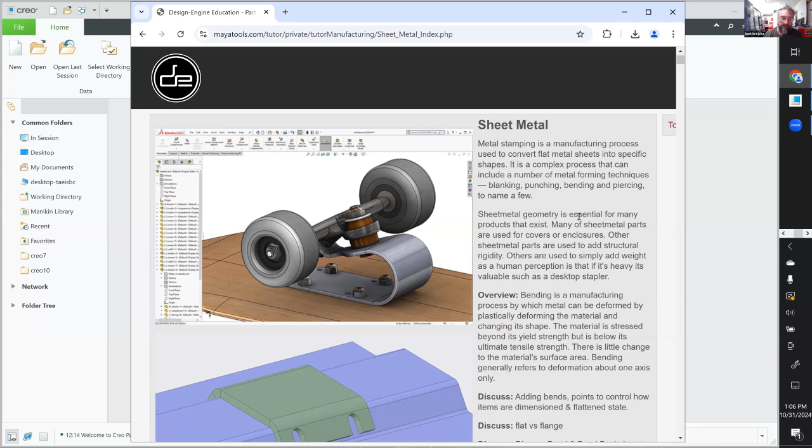You crash a motocross bike or sport bike, and the titanium exhaust bends, and you've got to fabricate a new mount because you don't bend titanium back - it'll tear. So you have to create a new sheet metal bracket right there at the track - vice, crescent wrench - which is funny because we don't take into account any stretch or K-factor that occurs.

So I thought I'd do a quick introduction of the class, and then you guys speak up and tell me what you want to see, and we'll wing it. I did a 4-day sheet metal class for a military group recently - most everybody had some experience in sheet metal, but in 4 days we pushed some really exciting examples using top-down design. I'm going to scroll to the bottom of this class and point to that.

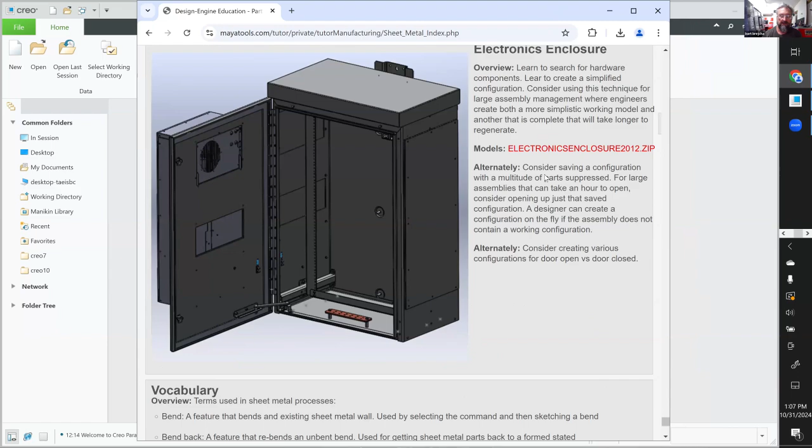I just recently did 4 weeks of training at Newell Rubbermaid, and this happened to be sitting on the desk - it's a sheet metal part that's bent. Built that all with top-down design, fetch a surface out of it, and then how do you put the holes in? You put the holes in flat, or maybe it comes as a perforated sheet and it's bent up in that way. But in Creo, you've got the bent-up shape - what do you do to build all that?

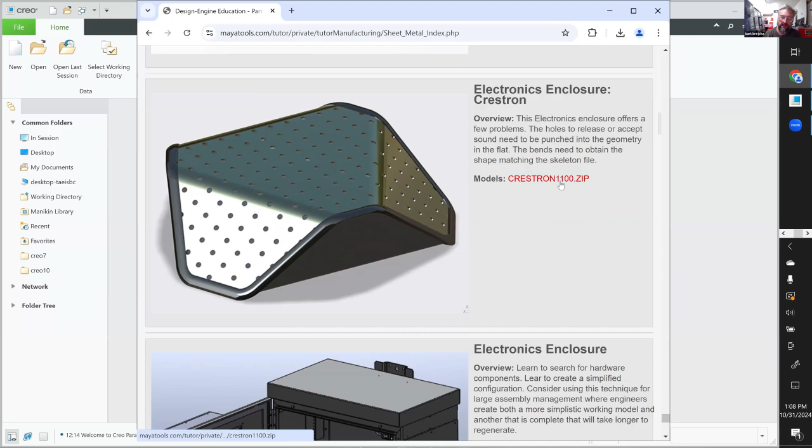So I just put that at the end recently, and in Creo - in Design Engine speak, anything with 1100 on it means it's done in Creo 11. Okay, so I'm going to scroll all the way back up to the top.

And this example has some skate trucks that aren't made with sheet metal. Your challenge is to use the same points that we created the trucks with - top-down design oriented geometry - and then put this spring part in, same points but a spring. Interesting project - this one is an IGES file, something you download from McMaster-Carr where you can buy quantities of.

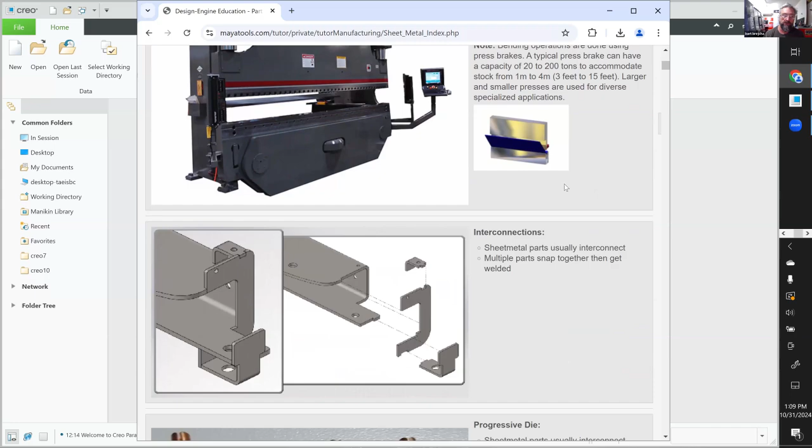How do I make a bracket looking at a step file? Of course, we're going to figure all that stuff out. But the classes have a wide variety of examples, and as you can imagine, exciting - Design Engine classes, you don't fall asleep in.

So with that kind of quick introduction said, I thought we'd start out kind of simple and build something like this. The examples can range, so I'll just let you guys start throwing stuff out there.

Here's a latch for your door in an F-150. What points are significant and how do we organize this? This is a sandcast or die-cast steel part, right?

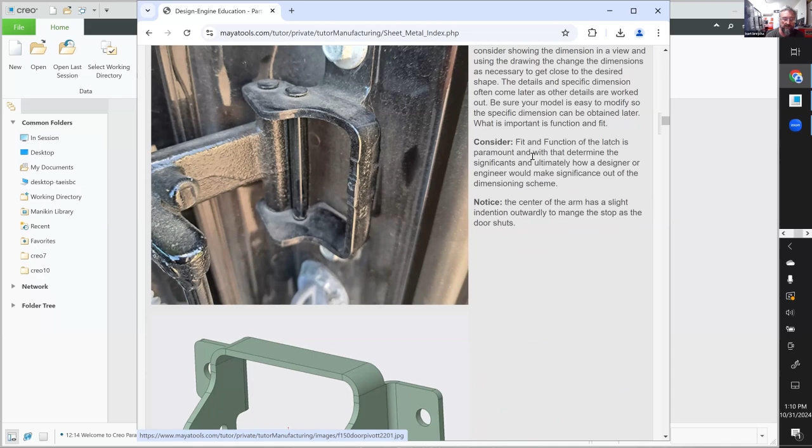What's significant about this bracket is this distance, because that part probably already exists. So we're trying to nail all those geometries. Here's the part that you can buy. Maybe you got a step file and you've got to make a bracket mount to it. There, that's the example, right?

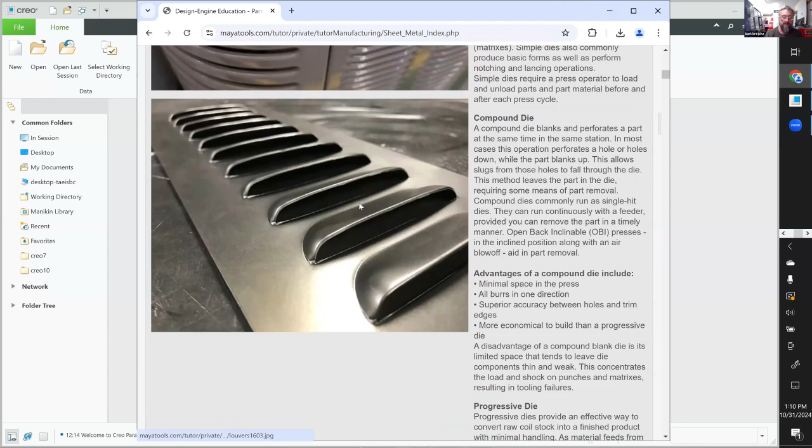So if nobody's going to throw out some thoughts, I'm just going to quickly build this shape here and think about how, we'll start out kind of simple. What do I do to build that?

Design engine's very geared at it's not how fast you model something, but how fast you change it 20 times that makes you kind of an expert. We can model it quickly, but if you can't change it, you're not the expert, right? So I like to say an expert would never tell somebody that they're an expert. They would wait for somebody to tell them that they're experts, right?

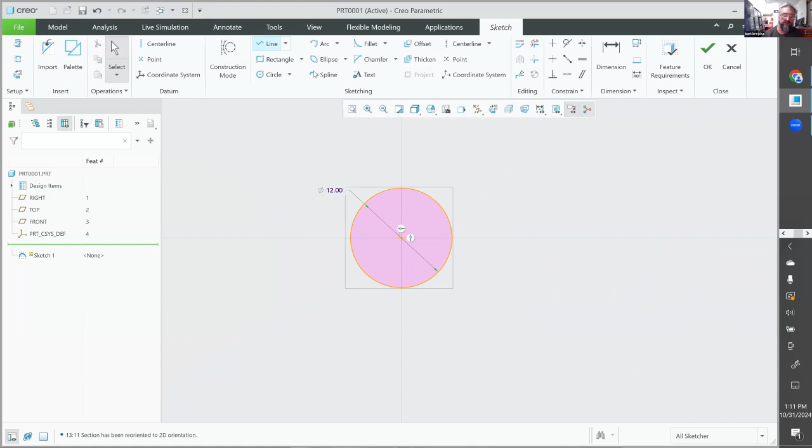So whatever the diameter is of this thing, is anybody in Creo 11 yet? Nope. Design engine, we just use whatever software the customer tells us to, so it's not a big deal.

Somebody's going to say something. I interrupted. Hey Bart. Yeah. I had a quick question kind of related to what you're discussing. Do you have any recommendations for how do you start just making a sheet metal part?

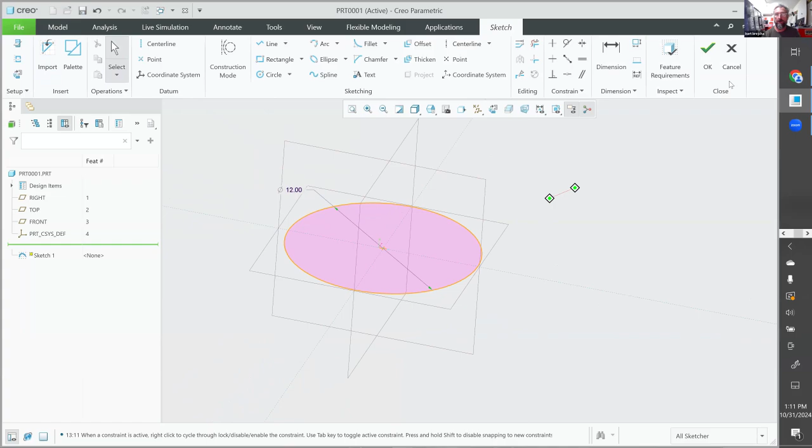Do you just want to put your pen to the pad, or do you want to think about it ahead of time? That's what I did. I started going to the pad and sketching stuff in Creo. So if you're working for the military, I don't mean to be insulting, but the military documents are all built in the 1990s, back when people were doing bad practice and stuff, right? So I just went and started into Creo.

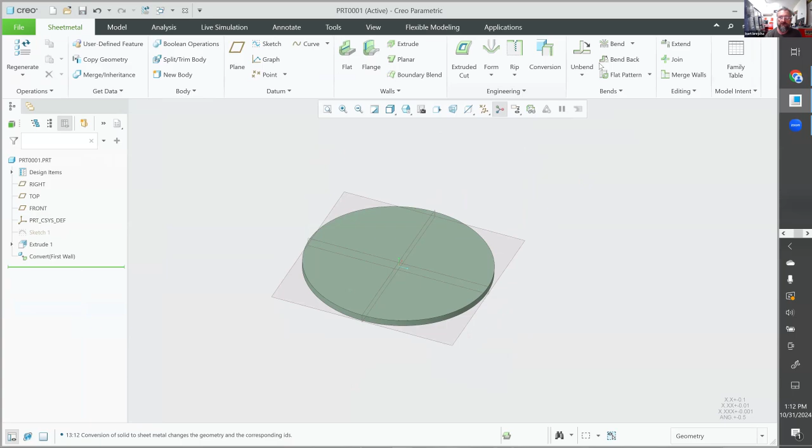But if I wanted to, I could extrude this part and convert it to sheet metal. So if you're a contract agency working in military, this is not how they want you to build it, right? So I can come over here and literally convert this thing to sheet metal. I tend to err on clicking on the side that the sketch is sketched upon, right? And now I can build a bend across here to try to bend the thing down, right?

So let's do that. I'm just going to get my head wrapped around the shape. It's a circle, it kind of comes to a point. I'll redefine that sketch to organize that shape.

So me and design engine itself, we're kind of new school. I don't know about you guys, but I'm kind of a rule breaker, not a rule maker. So I don't, best practice is kind of a rule, I suppose.

Hey, did you know this? I don't need a center line to force symmetry anymore. Did anybody tell me when that was new? I think that was new in Creo 7 or 6. All right, so...

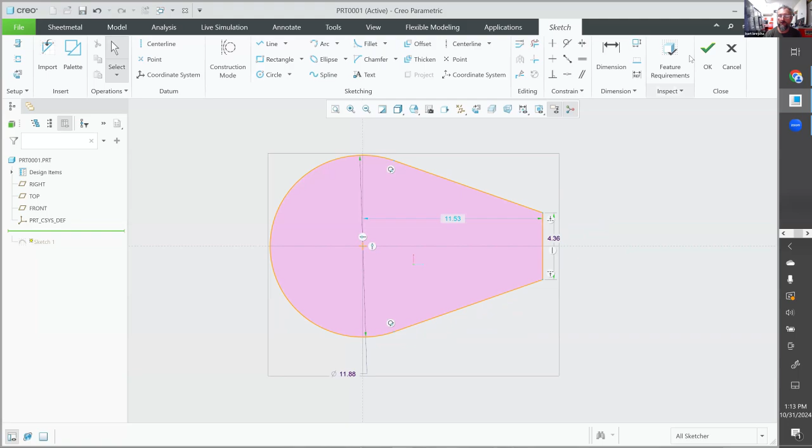Whatever I modify this to, or you could drag it with your mouse, right? That's pretty cool. All right, so that looks like the flattened state. I keep losing where my picture is. Yeah, all right, now I got to create the cut on the inside.

Well, people that count features would update this and make it more complicated. I'm not a counter, so I don't think it really matters. I'm just going to encourage the team to use all the cool new tools in Creo.

You see how I'm highlighting the datum plane? Don't ignore this pop-up window. I've been trying to encourage PTC to let me customize, right?

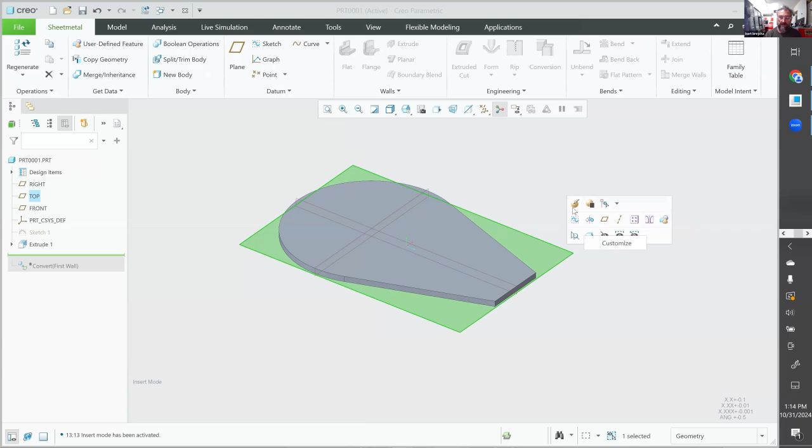You can right-click and hold down and customize this, but I want it to be like a marker menu and alias. I haven't actually shown how that works to PTC, but I think that would be the next step, in terms of having—AI is the next step. But I want to customize this geometry here, so I'm just going to quickly build.

See, I'm fetching the horizontal and the vertical, so I'm taking advantage of all the middle click, left click, delete, all the assumptions that I can leverage. I shouldn't mention SolidWorks, but SolidWorks doesn't have all that stuff. They started to go down that road, they just didn't finish it. Now I can use my coincident constraint to align this end to that end, right? So we'll just left click on that and turn it to a diameter.

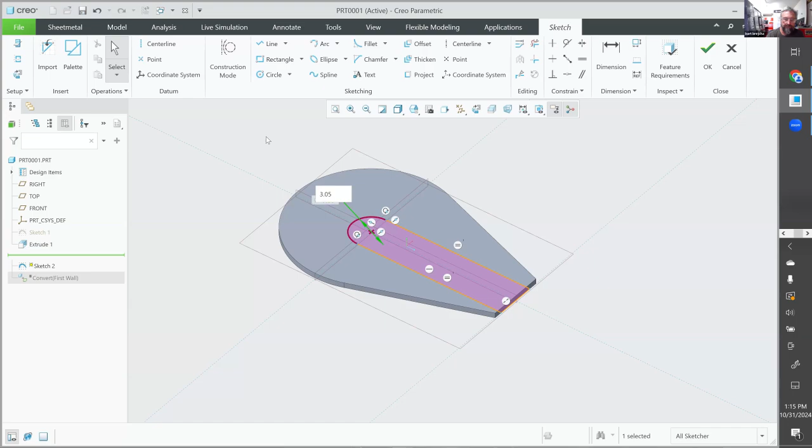And forgive me, I'm not thinking about the size, whatever. So a lot of folks, I'll tell you, if you give me people that have 20 to 30,000 hours on Creo, with Creo update training, I can get them 30% faster.

Most people don't know you can right click on these dots. That was new in Wildfire 5. Nobody's doing it, so my goal is to be new school. Also, most MEs don't know you can drag stuff around in Creo, and if they did, they would lock the dimensions in sketcher mode so you can't do it.

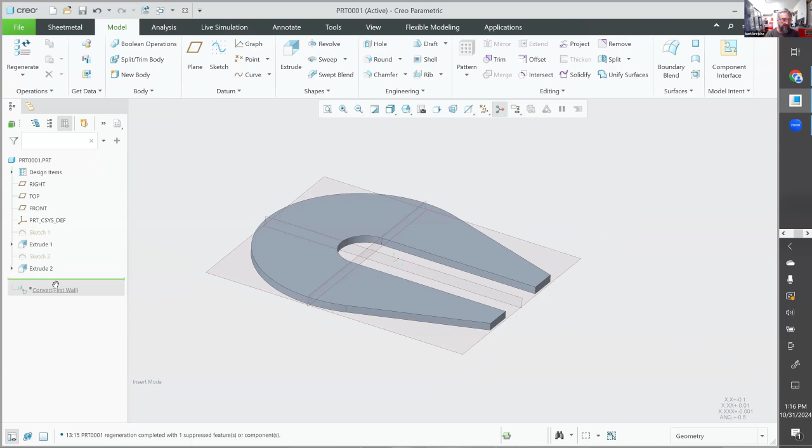All right, so there's my basic shape. Now this was my feature to convert to sheet metal. The question was, do I go file new and start with a sheet metal part? If you work for the US military, there's a 70-page document that says you have to start with a sheet metal part - you can't start with a solid part and convert it to sheet metal. No big deal, so now I'm in sheet metal.

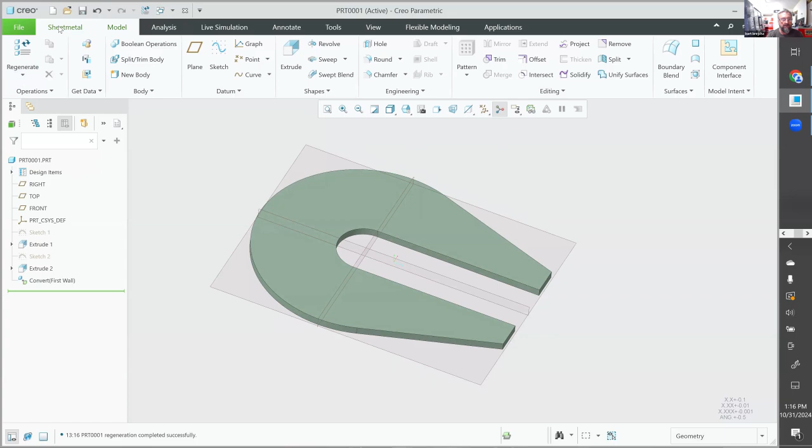I'm in the tab for sheet metal, and I'm just going to reach for the bend utility. I click on the part. Now, I don't know what year this was new, but PTC wanted to be able to show off the utility, I suppose. This is a what-you-see-is-what-you-get dragger utility. I personally don't use it - it's cute and everything, great for sales.

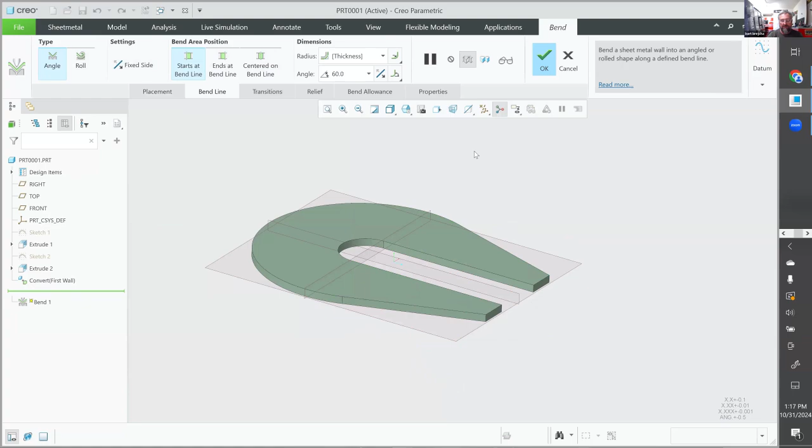And you can drag all this stuff. I just want it to be straight across. So what we've done for 30 years in this utility - I think I started playing with sheet metal in 1992 - is you take the bend line back to the sketch. See, I lost that whole thing I just did, so it's not even helpful. It's just creating something that's absolutely straight across. Look, I got the automatic vertical.

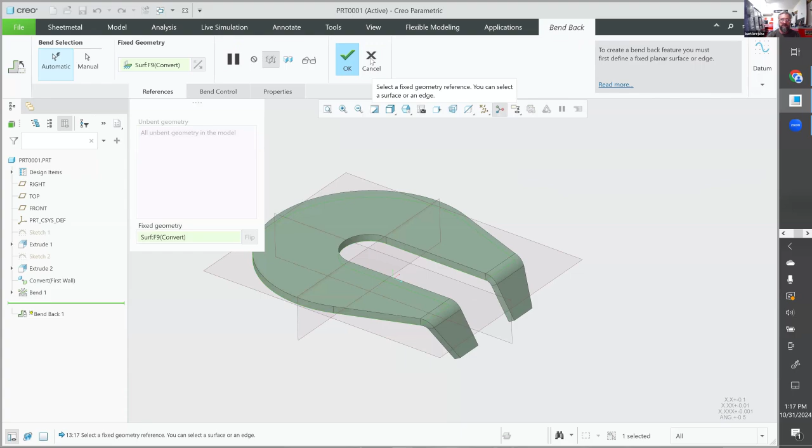So I think that's a basic bend. Now, if I wanted to put some holes in here, you got to unbend the thing, add your holes in the flattened state, and then I hit bend back, unbend, and then you add your holes, and then you hit bend back to get it back to what you had.

I'm on the technical committee for sheet metal, but I haven't ever joined the meeting and talked about it. But if you do a bend and a bend back and add holes, I would want that in the model tree indented just a little bit, so designers can see that if they want to add something in the flattened state, they just go to insert mode and add it.

Questions, thoughts, comments?

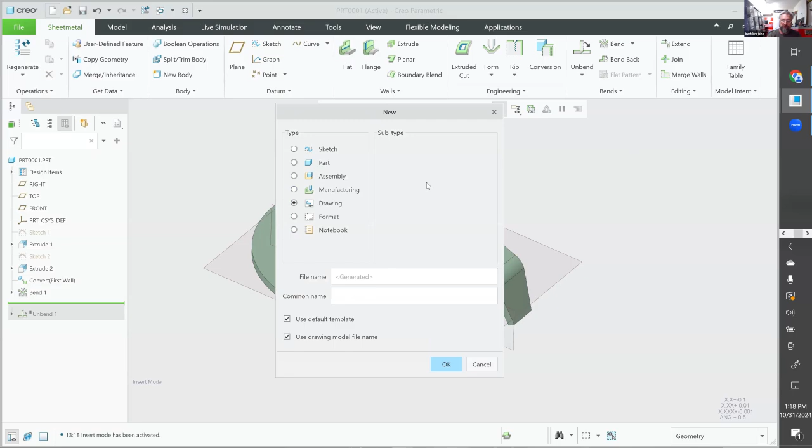Also, I think in the Learn to Design course, if you give me some young people to teach, what I do is I teach them how to use the drawing intelligently. Now, I've done this for a lot of SolidWorks users from Stanford and California, whatever, that everybody thinks they know SolidWorks, right? Or Creo for that matter.

So what I did is I left click on all the features in the model tree and show those in the model - do that again, I'm clicking too quickly. Any features that get displayed, over here are parametric, and I can modify them.

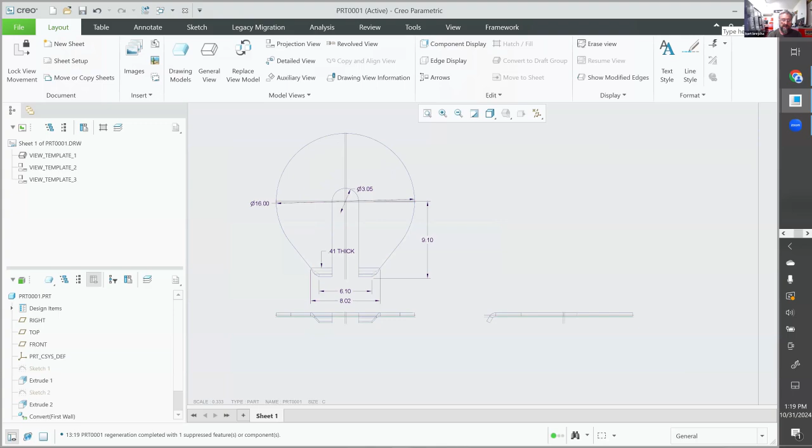There's my diameter - oh, that's supposed to be 16 inches, right? So I could just double click on it and type in 16 and Control G. And when I do that in a class, everybody's like, okay, I'm sold on Creo, you know, because they're SolidWorks - they did one semester in college. So what I'm trying to say is SolidWorks does that too, right?

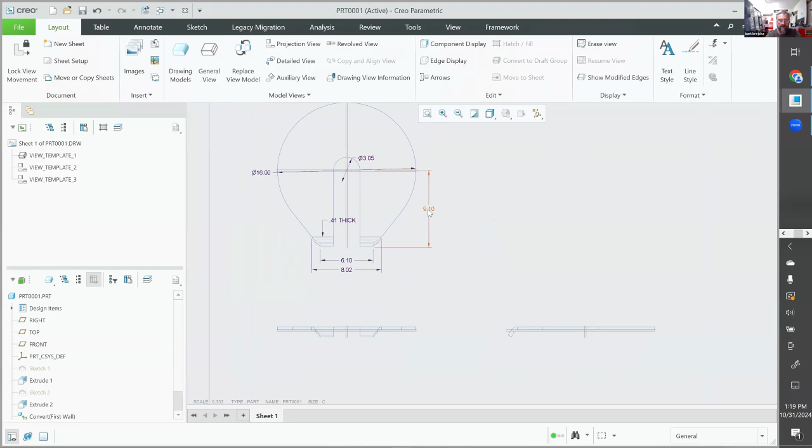So this number is where the bend starts. Here, let's type in 12 and see what happens. If the bend fails - okay, no, it was the overall length. The bend is going to be in another model, right? Or in another view.

So I would hope that for most people that's not new, right? I can double click on this diameter, change that number, and hit Control G on the keyboard and get that to update. Now it's a little bit too small, so I can change this one, make that a little bigger.

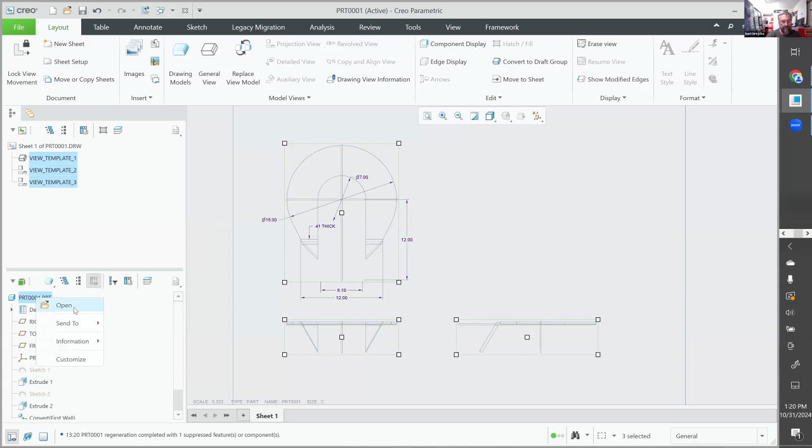Each change, I'm hoping and praying it doesn't fail and explode and freak me out. But using the drawing as a tool can be extraordinarily helpful.

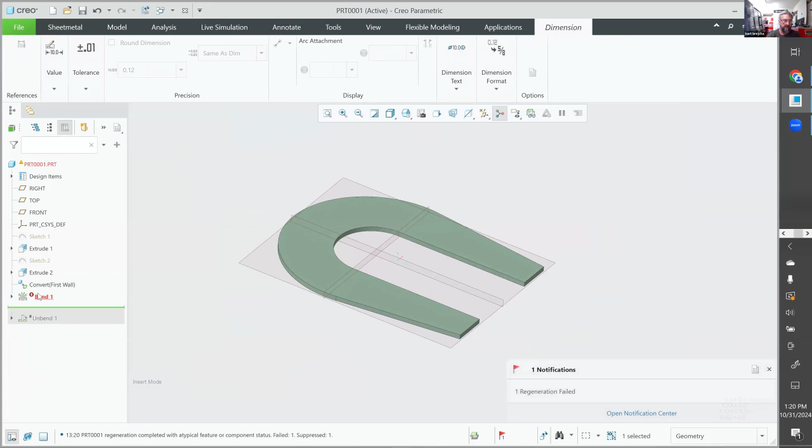For that first feature, I'm just going to make this one a little bit bigger. Oh, now my bend is failing. Can you guess what would be the problem with the bend? So let's edit definition on it and wade through it and see the bend is a little bit too far up, right? So it needed to be adjusted for all the changes I'm making on my model.

Let's think about how we want to control how the bend is communicated. I'm going to do it this way. Why is that? Oh, get rid of that dimension. So it was controlling where the bend was with a horizontal dimension. I wanted this one instead. So let's check that out. The bend's not failing anymore. So it's about being comfortable in fail mode.

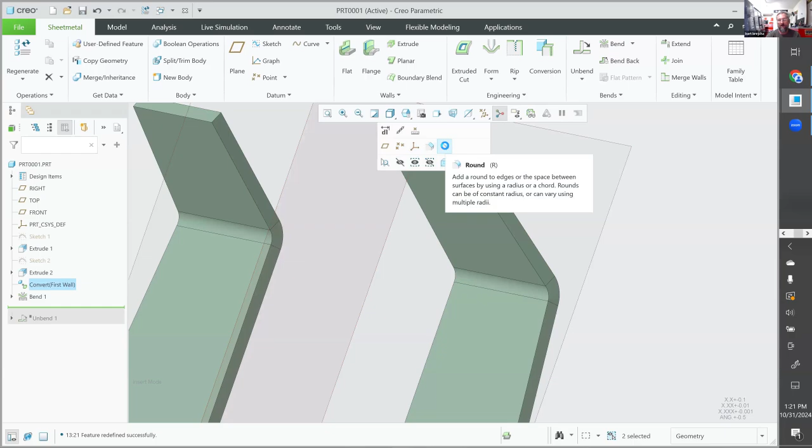Here's a really cool little trick. I'm going to left click on this edge and this edge, holding the control key down for the second one. Don't ignore this pop-up window. There's the round. Don't move all the way across and grab full round. Explore what's underneath your right mouse button. You can fetch the full round out of there.

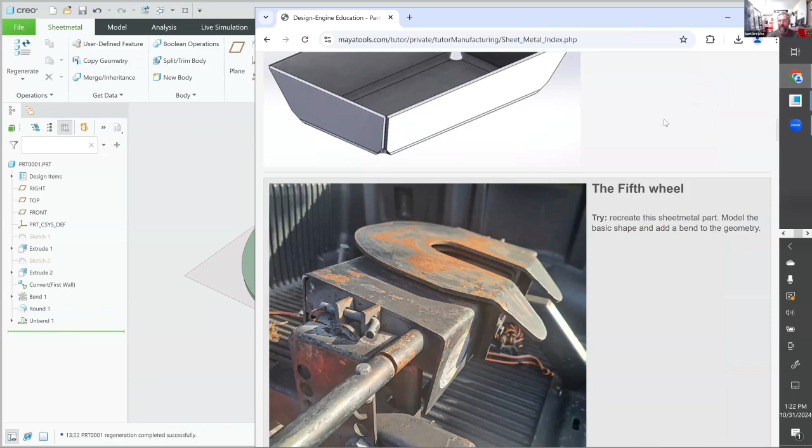All right, thoughts, comments? Do you want to go to something more advanced? I got this. Hey Bart, can you hear me?

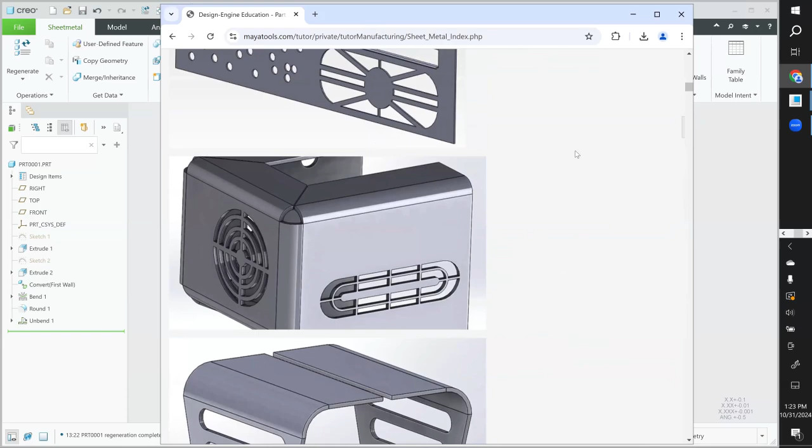Yes, sir. Would you mind doing that kind of stainless steel looking thing that's below the generator picture? Go up. Keep going. A little more. Right there. The louvers. Or do you think that's... Actually, that's where I was just going with it. This little flag that's for your mailbox.

Right? It's a form feature. It's got, I don't know if you can see, let me stop sharing so you can see the bigger screen. It's got an indentation, it's just stamped. A lot of people think stamping something costs more, but it can actually be cheaper. The tool to stamp this probably only costs two, three, four hundred dollars, and now you can pop them out faster. The stamp can actually cut the outside of it too.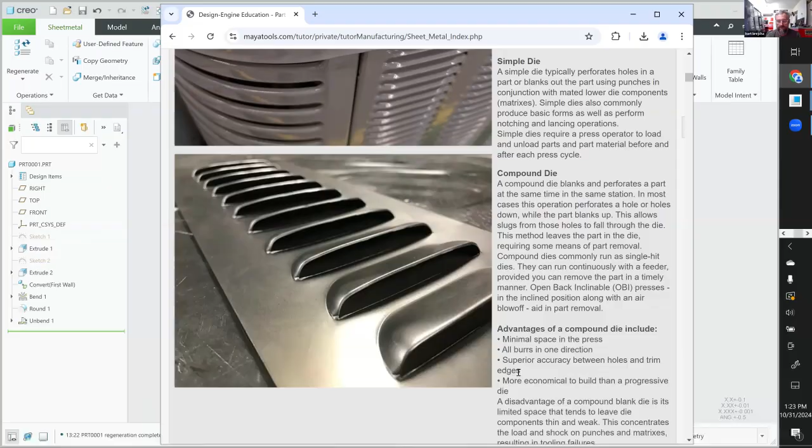So yeah, let's do one real quick, and then I'll do a louver second. Okay, so there's value in starting with the solid part. The idea is, if you start with a sheet metal part, you can't save it out and create a tool for it.

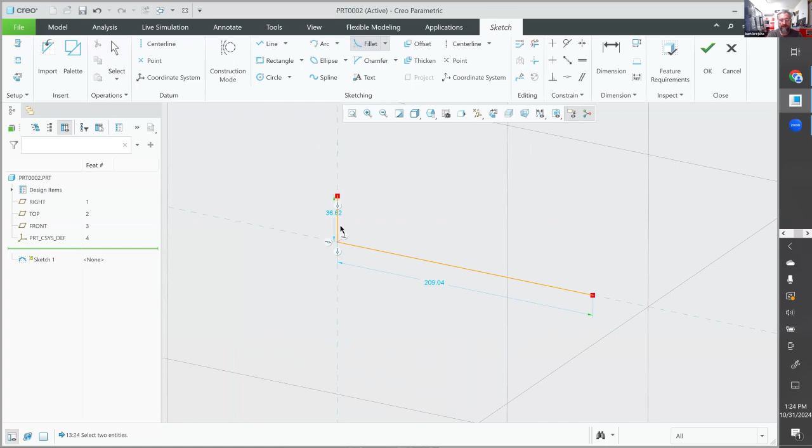I'm just going to do a couple of these real quick. I'm going to build a little part that goes in the back of your computer that fills the slot where your video card goes. So that little sheet metal part looks a little bit like that. I'm just going to extrude. Automatically it turns into a surface, so I'll do solid and thicken.

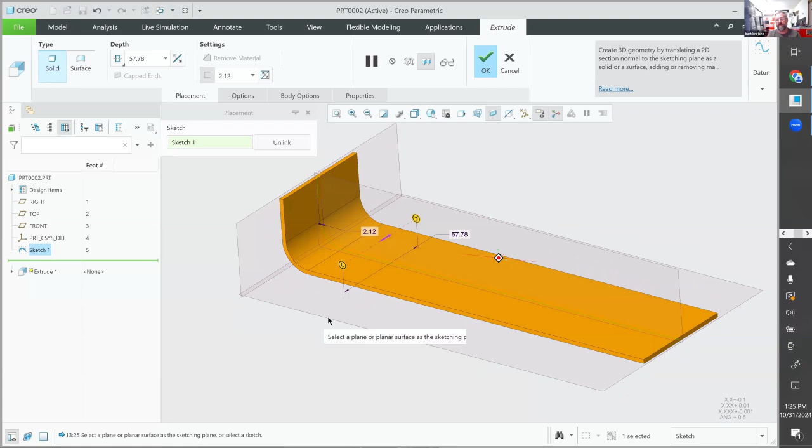I've met a lot of people over the years who sometimes have a bad attitude. They say, I don't need to learn sheet metal, I can model anything in Creo without the sheet metal module. That's probably true, but the sheet metal module is so convenient. You wouldn't do that if you took a minute to learn it. So I don't think doing a thicken is a great way to build your sheet metal part.

All right, so I did that. Now I'm going to rename this and call it clip or whatever, and then save the file. Then I'm going to save as a new name. The reason I'm doing this is because I'm trying to build a form feature, a tool that I can have machined, so I'm going to call this the same part name underscore tool. If I did it as a sheet metal part, I wouldn't necessarily be able to convert the other one as effectively.

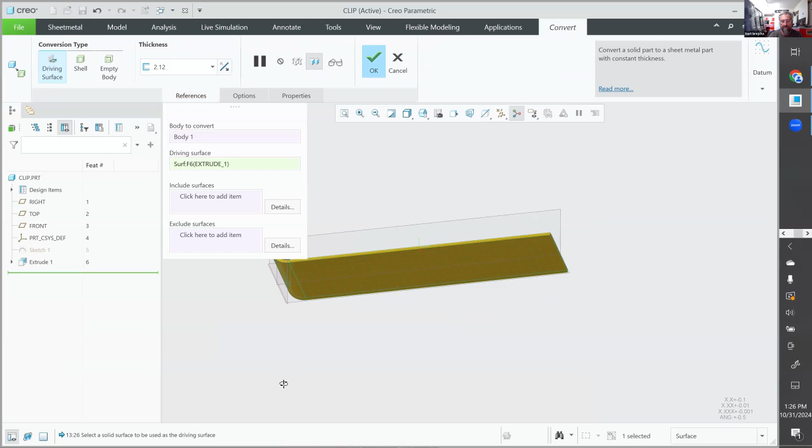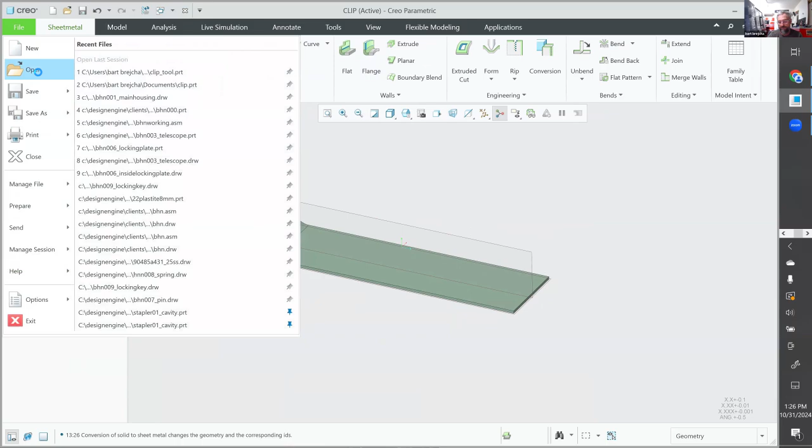So, I'm saying it's good practice to start with a sheet metal part, but in this case I didn't. So here I'm going to convert this one to a sheet metal part. If it doesn't convert, your problem is probably that wherever you got it from, there's a 16 thousandths of an inch wall, and another wall is 17 or 18 thousandths, or a different gauge. It's a little off, so it won't convert. Your logic would be simple to fix if you knew what the problem might be. So I'm going to search for CL, star, for clip, and find that tool on my drive.

And then I'm going to delete the extrude on this. The sketch can remain the same. I like having the sketch there because then I don't have to get my orientation just right on my tool. All right, so I'm going to delete this stuff, and turn it to a big piece of steel.

My thought is a typewriter is basically a form punch, and if you feel the paper that the punch made, you can feel the bump for the letter that hit it.

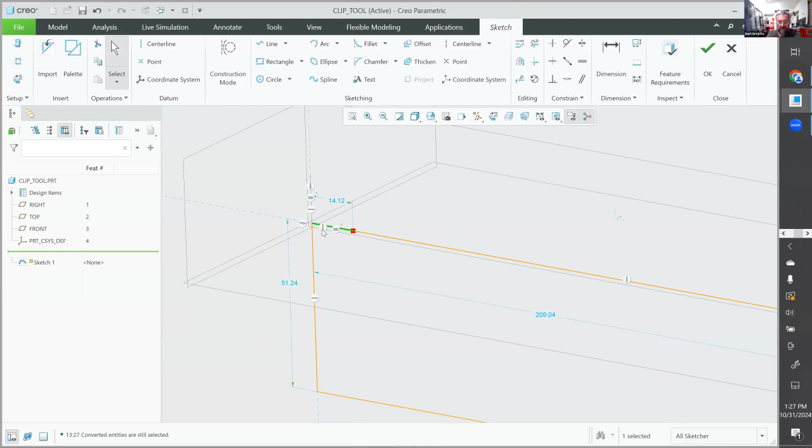There's a piece of the round that I deleted that's a little legacy data floating around in there. It took me a second to realize what it was. It's the difference between using this round, which was what we had prior to Wildfire 5, and this round, which puts those little legs in there so your detailer can dimension to the edge. So right hold down, symmetric.

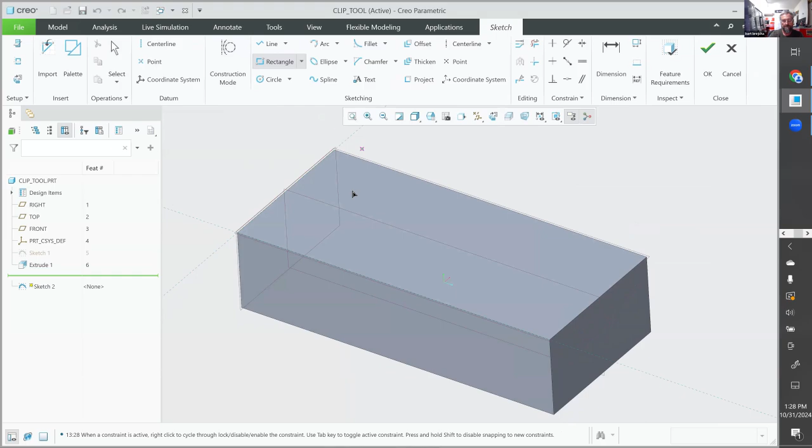And now I can create my tool. So I'm just going to make a bump to give myself some structural integrity. Okay, so let's build a gusset.

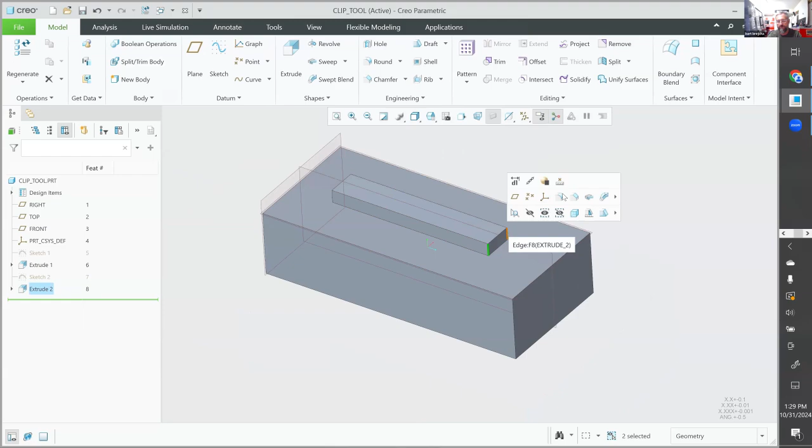This is the form that I'm going to press into the other part, right? Sheet metal doesn't really have draft on it, but you might want to add a little bit of draft to this thing so it pulls out of the mold just right. Left click, round, right hold down, full round. New set, the other side, same thing.

Yeah, I'll add a little draft to this face relative to this base. So you don't need draft on it, but it helps.

And in version 13 of Pro Engineer, this number here needs to be larger than the material thickness of the part, right? So let's think of that logic. So there's the tool, there's the clip.

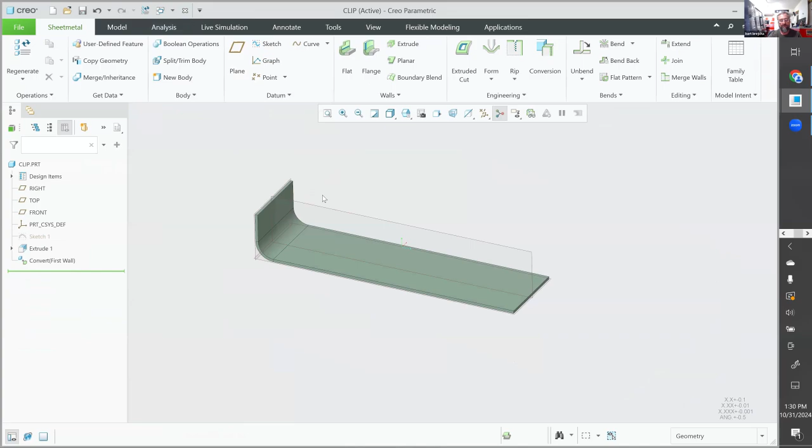So I want to create a bend over the top of a form that was new in Pro Engineer version 13. At that time, I was working at Motorola building little sheet metal beryllium copper battery contacts. What year was that? 94.

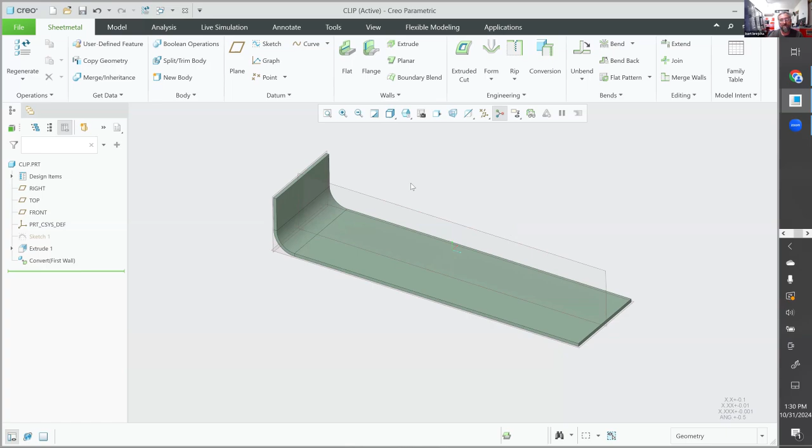All right, so I got to reach for this form tool. There's a whole bunch of different types of forms. I'm just going to click on the form and take the default form. It's asking - I probably have a library of forms. All right, I'm just going to click on out of memory and grab one.

Now, it'd be really cool because in a typical assembly mode, I'd right hold down and say lock it to coordinate system. But people wouldn't think to be organized like this, so it's not going to be a coordinate system. So I'm kind of going old school. I'm placing it like I'm in an assembly mode.

The datum, I'll connect to the datum. And look, there's my formed feature. Right.

Now, when I'm doing a deep draw for like an oil pan for a car, the material is going to stretch. Creo doesn't take into account that stuff. You'd need a specific FEA utility that could do flow mold analysis. But any changes you make to the mold, of course, Control G is going to regenerate that thing.

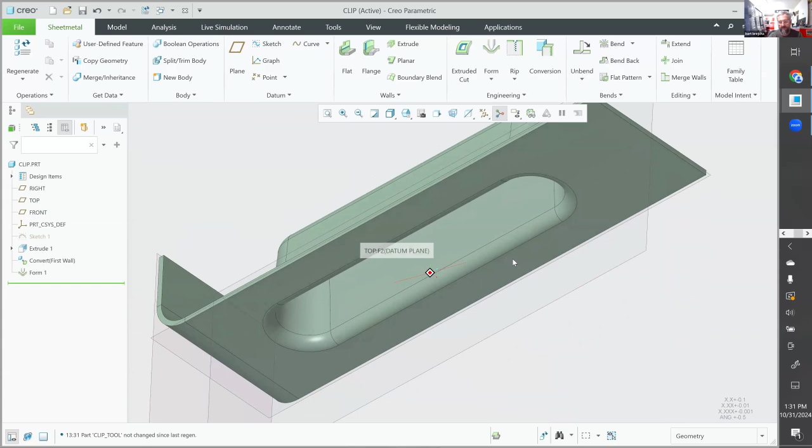Cool. And let's think about those radiuses that we built. Look, if I'm forming that radius, it's offsetting the material thickness to get the shape. This tiny radius, if it went to 0, it might not work, right?

Control G. Let's put a bend over the top of the form feature. That's where, in the case of a beryllium copper battery contact, I'm going to kiss the battery, and I want it to make absolute contact. So a lot of times we would add a bend over the top of this thing. Here, I'll just quickly use these silly little...

Like I said, this was new in Pro Engineer version 13. I can do a bend over the top of a... well, that's cool.

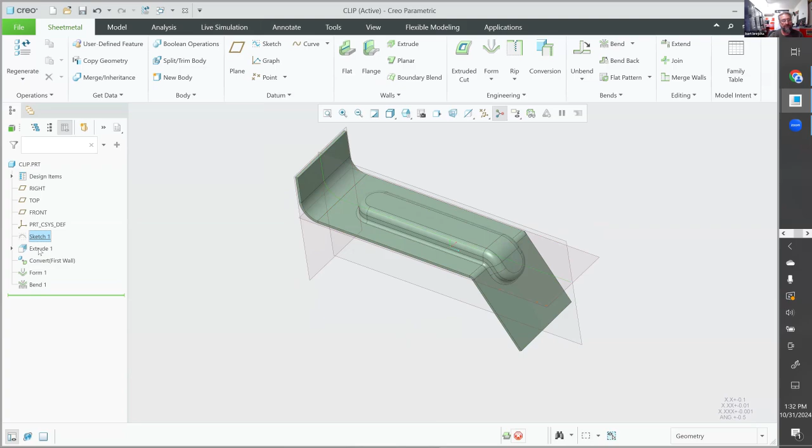So let's think about how you would do a louver. So I'm just going to take this part and make it, I suppose, just make it bigger and convert that to a louver.

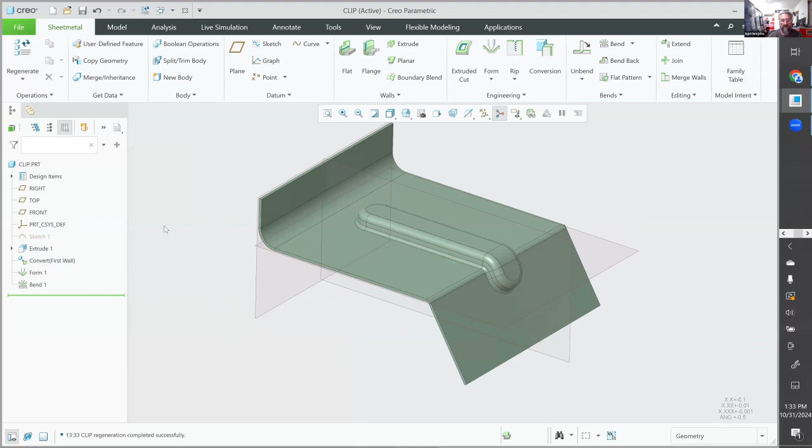So I'll end on that one. But this form feature, I'm going to redefine it and tell this one to be a distance. Now I can pattern it with a number, see?

And PTC's done such an incredible job - I sound like I'm a PTC employee, but they've really done a good job with these tools. Look, when you drag that distance, you can run completely off the edge and it still works. I'm impressed. All right, so now I've got a parametric number that I can pattern, you know.

So pattern. I'll go a little bit more. Well, I'm patterning the wrong way.

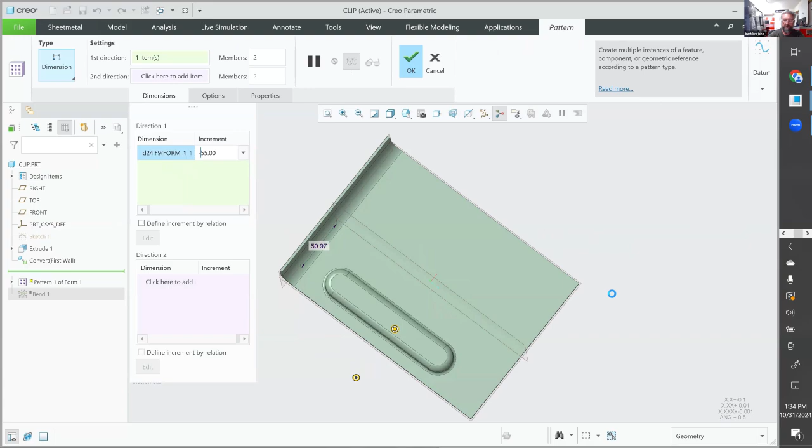That's pretty cool. And you can copy and paste these to separate parts.

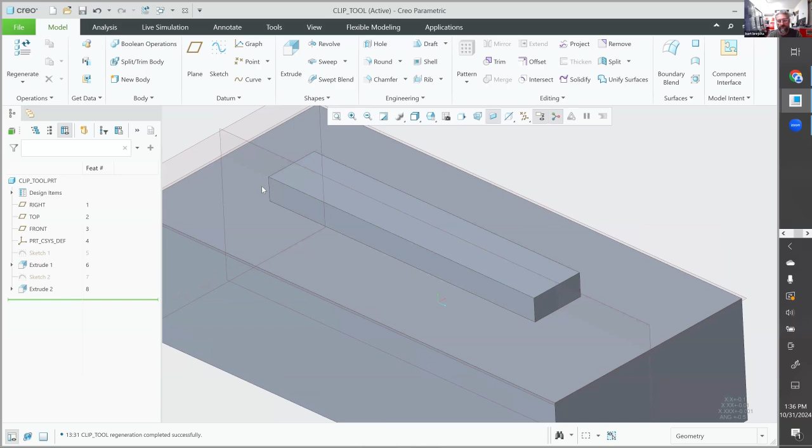A louver is typically designed to keep water out but let heat escape. So I was just going to play around with the rounds a little bit. Right, hold down, fetch a round.

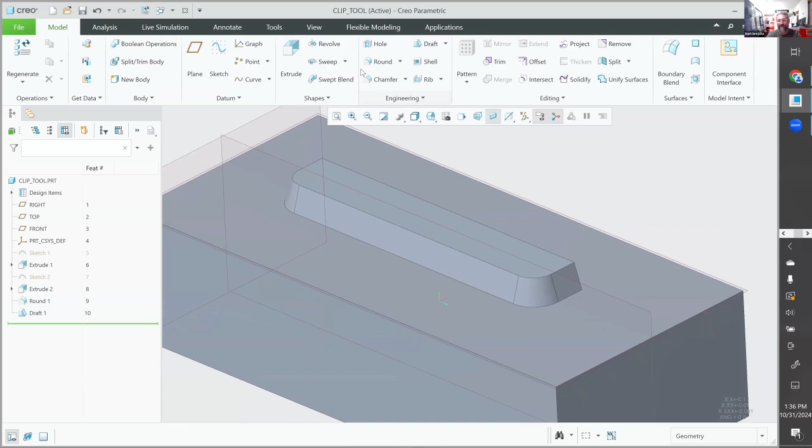I'm eager to play with draft. I've been teaching plastic part design classes, and the people that come out of that class are so much better at Creo than they were before. It's like a bit of an excuse for an advanced part modeling class.

All right, so there's my rain side of the louver. Put a round at the top here. Cool, let's see what that's going to look like. Control G, right? Now, how do I remove this face so I can let the heat escape? All right, edit definition on the form.

Got a bunch of other software packages open all at the same time.

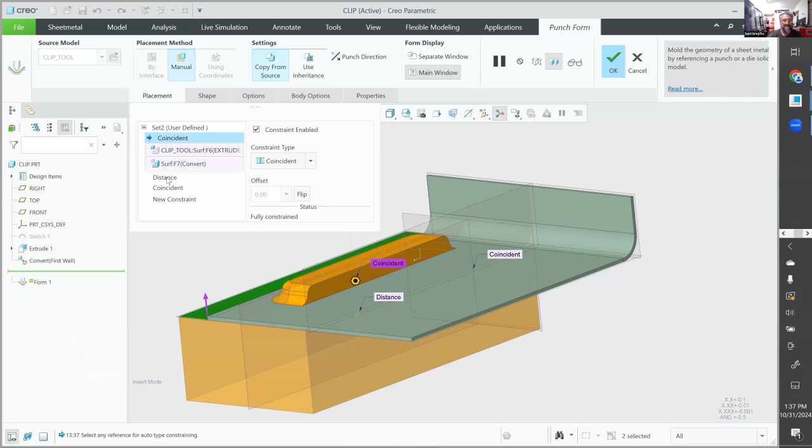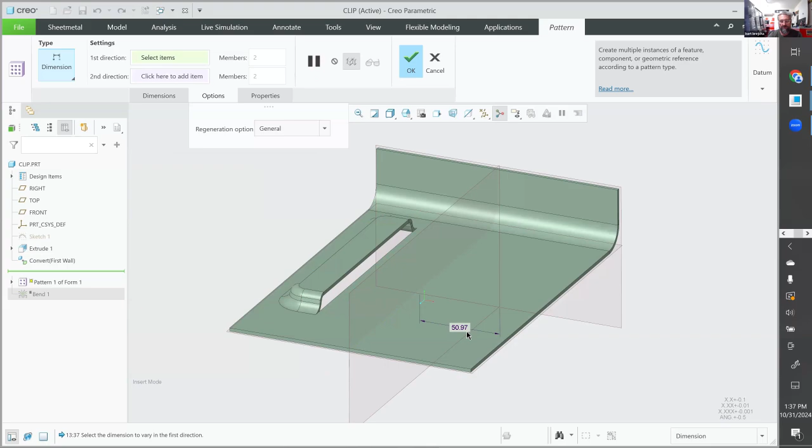Exclude punch area, right? And by golly, you know it's going to pattern because we just did that. What's badass is copying that louver to another part. At Design Engine, we call that cannibalization because you're stealing somebody else's work, you know?

What else would you guys like to see? Art, I have a quick question. Whose voice is that? Same, this is Cody Riddle at Miller Industries.

Hi, Cody. If you take that same form tool and you take that idea of laser cutting that plate and then you wanted to form kind of like a dimple die, I believe the form tool will keep a sketch of the original cutout inside the model after it's formed. Is there a way to reduce that, or not have that sketch of the original cutout?

Do you want to take my email address down and take that after class? I'm not picturing in my mind exactly what you're saying. Yeah, I'll take it down. If today's Halloween, you know, I got a 7-year-old, so maybe today's not a good day, but Monday next week might work. Okay, thank you.

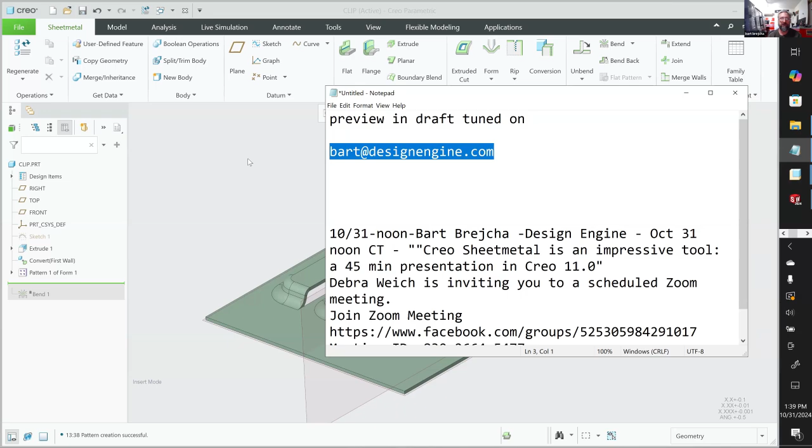Send me a Zoom link for Monday, or Friday night even, and we can talk about that. That's how I learned, you know. It's like, show me a problem and let me play with it for a minute. I love that. Okay, thank you.

Did you catch my email address? Yes, sir, I got it.

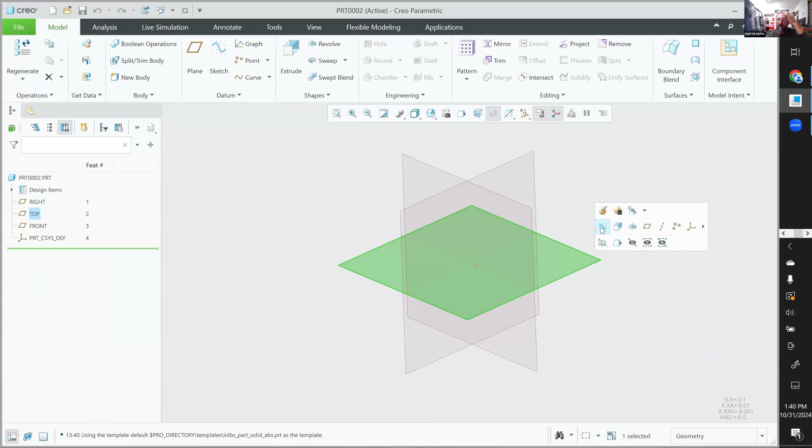Let's do something else. I told the story about working for a sheet metal shop that was doing small enclosures for the chip on the motherboard, and they only wanted to pay us 3.5 hours of our rate to do this thing, and we thought it was going to take more like 6 hours, including the drawing, to do each one. So one Saturday, three of us or whatever, we sat around trying to figure out how we're gonna do it in 3 hours, just wasting Saturday, like there's nothing to do in Chicago.

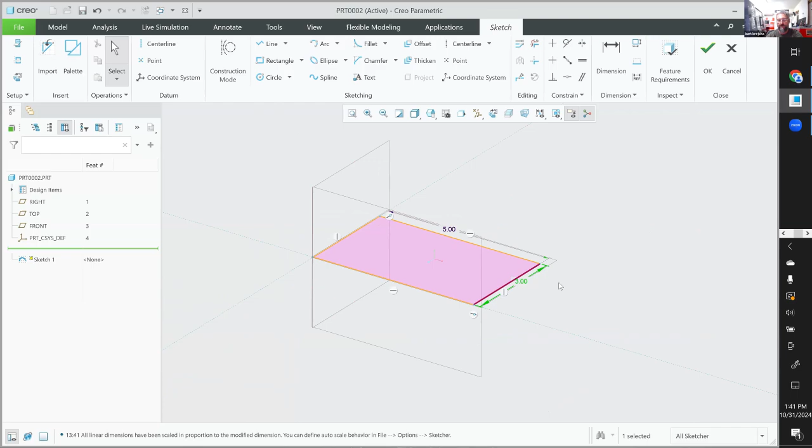So I'm gonna make this little part, whatever, I'm doing it as a solid. This is pretty cool what I'm getting ready to show you. So there's my little area that's covering the firmware, the silicon chip. What can I do to convert that to sheet metal?

That would enclose the chip to keep the microwave oven from bothering my cell phone. Back in the 80s, when microwave ovens came out, your CB radio quit working because it wasn't shielded.

All right, so first thing I want to do is convert it to sheet metal. Like I said, if you work for the Army, they've got rules against this, but I just think it's old.

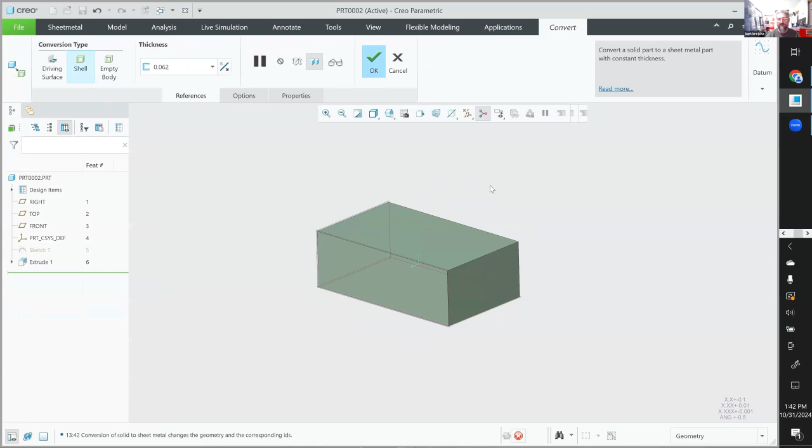People like making rules. So there's my sheet metal part. I'll do it at cold rolled steel thickness. I shelled it inside the utility so it's hollow. That's not gonna flatten, I don't need to click this button to see it flatten. I just know it's not going to work.

This is a confidence builder, right? It's got other functions in there too.

By the way, I would write this down. Send Cut Send is where we send all of our sheet metal prototype stuff to. They are badass, and they send a piece of candy in the package that comes back, which is pretty cool. I don't eat candy, but it's awesome. Nice touch. Let's see, so I did a convert to sheet metal over here, right?

Don't get conversion mixed up with convert to sheet metal. I think if I were part of PTC's UI team, I would say call it something other than that starting with the first letter of convert. C doesn't work. This tool is very powerful, quite powerful.

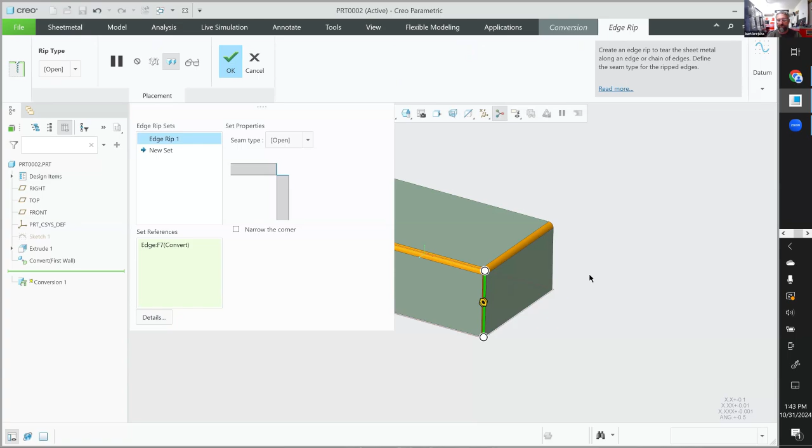So what I can do is fetch all these edges, and look how it's ripping the edge, turning that thing into a model. You want to be mindful.

SolidWorks users like to rotate the screen. Don't do that, click right over. You just want to be mindful to get the outer edge, not the inner edge. Middle click, and look, now it's going to flatten.

Now, I don't need to click that to see it flatten, but some people lack the confidence, you know. Little Debbie box, right?

So let's see what we can do to this to play with it some. Turn that off.

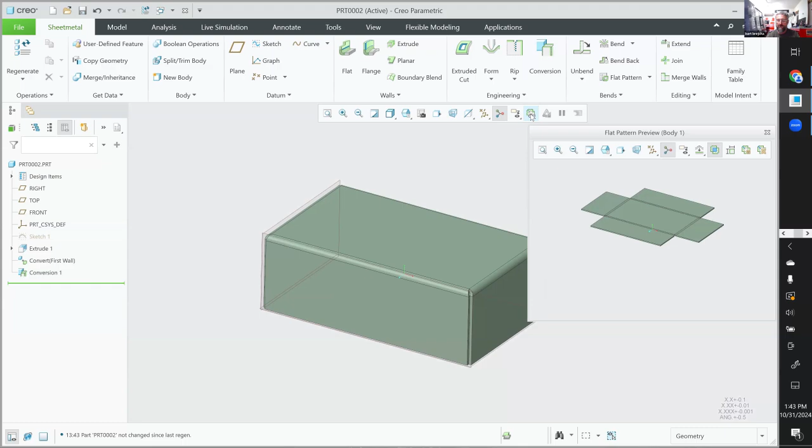I'm confused why it's not going away. Usually you click this and it goes away, but it's not disappearing for me. Oh, you hit the X. Great, who would think?

So let's do that again, but let's make it just a bit more complicated and organize how we're going to break the little Debbie box apart with dimples and all that stuff. So what I do is I build my dimple on here and then cut and paste it over to the other side. It's kind of silly how SolidWorks doesn't do any of that cool stuff. I don't know how people like SolidWorks better, at mild ignorance I suppose.

All right, so what I'm going to do is put a point up here, and I'm going to reference the point to this other side. I don't know, I'll make it 1. I was going to make it 1.5, but I'm kind of lazy. I'm going to put another point down here and make it the same distance. Lazy to reach for 0.5, right?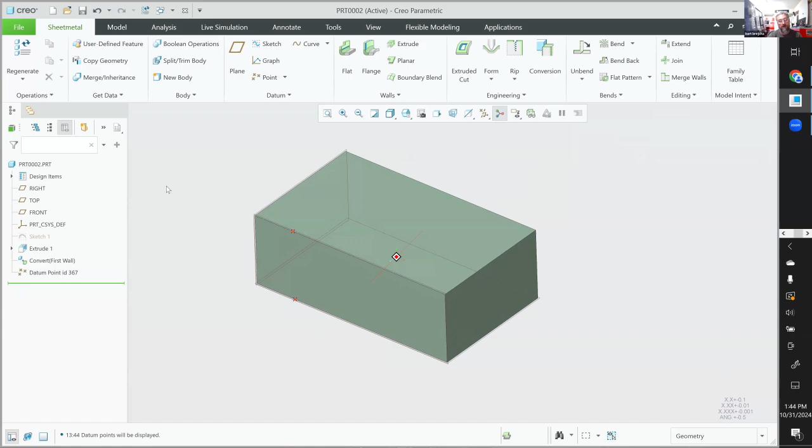All right, now let's turn so we can see the points. What do we got to do now? Conversion, right?

I'm going to rip the edges, except I'm going to rip only 3 edges. It's just about to the spot where it won't grab the other side. That would be the inside. There's the outside. Cool.

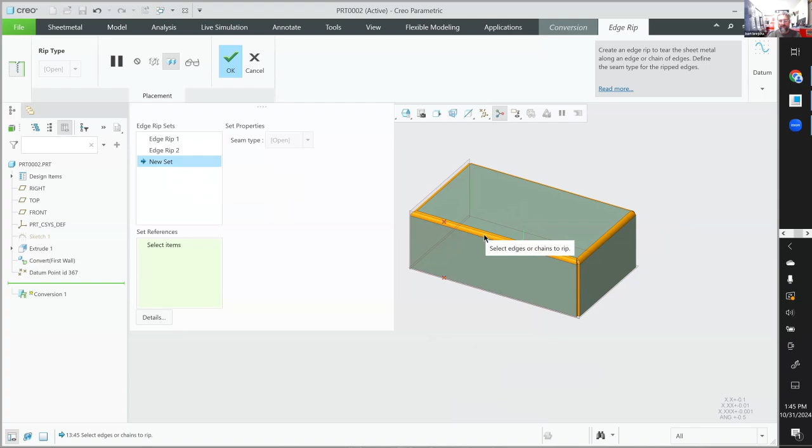Now I'm going to, like in rounds, got a new set. I'm going to put another rip up here. And look, you can drag this one back and hold the shift key. Control Z, do the other side. Snap it to the thing. Look how it built a round for me.

I didn't put that round in, I'm just using edge rips, and I did a new set. Rip connect. I could rip connect this thing and basically kiss both of those points.

That's a whole different way for a little Debbie box to open. And of course it flattens. Yeah, you can see pretty quickly.

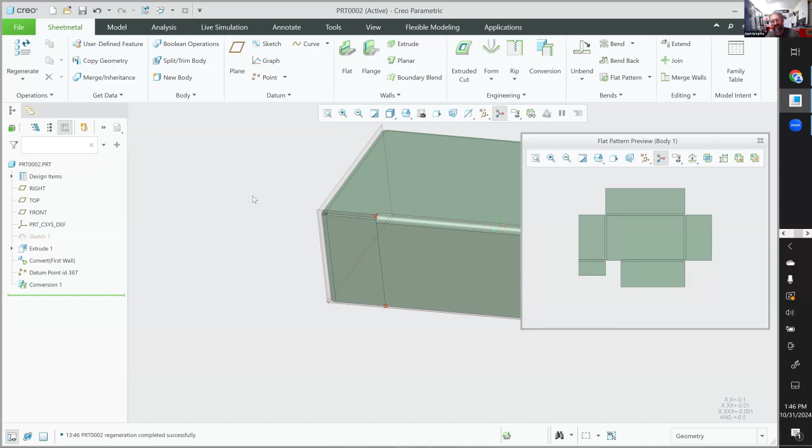I did a class for the U.S. Army, it was a 2-day sheet metal class. And I was told before the class started that everybody had 20 years of sheet metal experience. I was really intimidated by that, so I prepared quite a bit, but they barely knew sheet metal, so no big deal.

But look, it got the rounds. So let's organize the obround. I think the obround looks really nice. So let's edit definition on this thing.

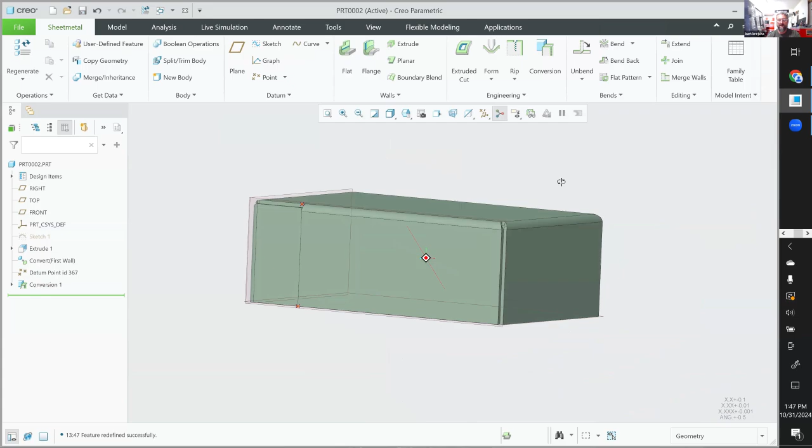That's pretty cool, I'm excited by these tools. So of course it flattens.

I think we're just about out of time, but if you wanted to, we could download this. I built this one at Newell a couple weeks back. Let's just take a minute to poke through that and think.

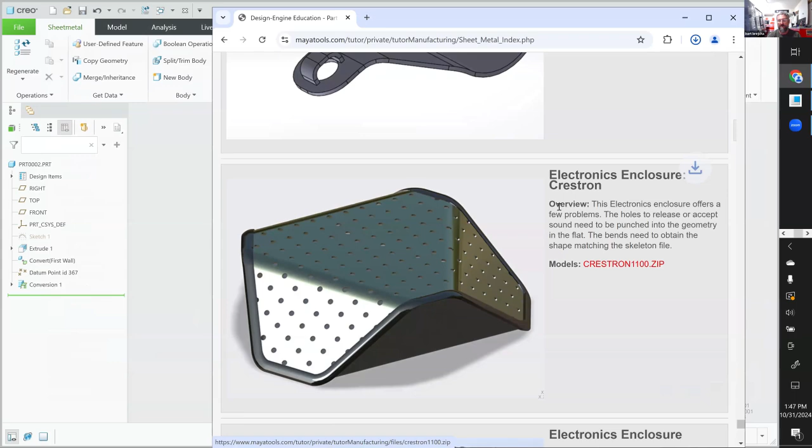So I published a little bit of surface out of here. Published geometry is how we teach this in terms of the teamed approach. A lot of people get in their head that top-down design is not appropriate, and it's fun to make fun of those people. But I think of this copy as a timestamp, and then I published the surface of the copy to get this surface here.

That surface is what created the sheet metal component. Then I converted it to sheet metal, had to flatten it and organize the pattern of holes. I used the word flatten, but I meant unbend and then bend back. Those, I think of unbend and bend back, as what's hiding in the parentheses.

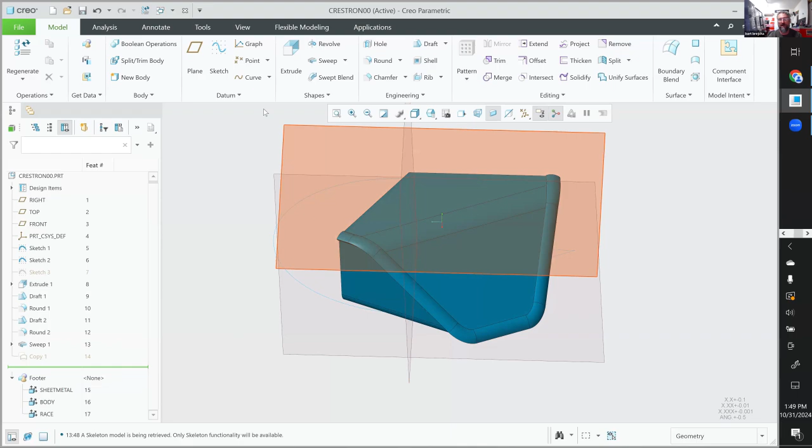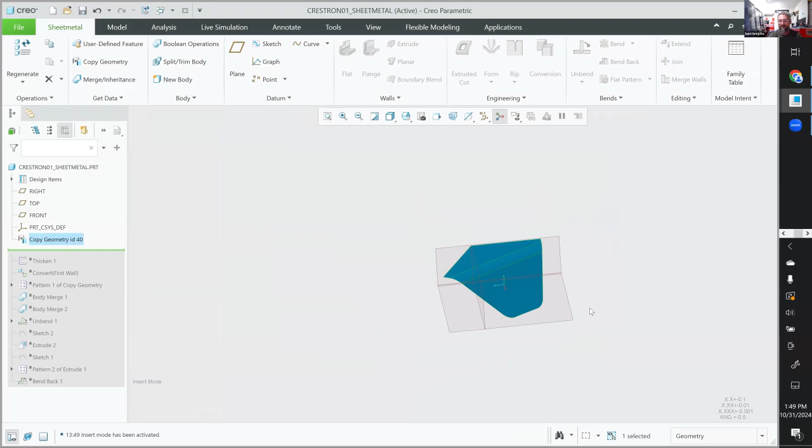So let's go look at that little sheet metal part now. We call this ECG, or external copy geometry. I usually rename it, but this isn't a real project. When we do projects for Amazon, they make us work inside Windchill, and I would rename stuff to be a team player. But this isn't a real project.

There's my thicken, there's my convert to sheet metal. I patterned it. Pattern solid bodies doesn't automatically merge it—PTC forgot to put that button in there. Let's look at that and make fun of PTC a little bit. The option would say merge what patterns, or try to merge what patterns, but that's not there, so I got to merge the whole thing.

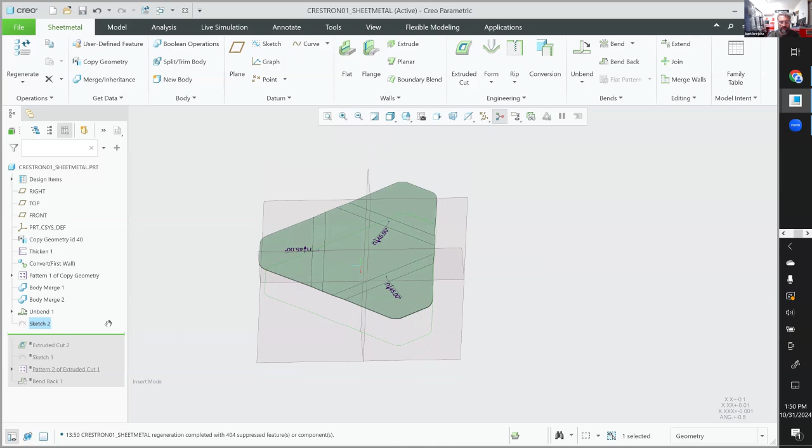No big deal. And then unbend it, build a little hole somewhere. There's my hole to let the sound escape. I don't see it—it's probably off the page. Oh, there's the hole. This cut trimmed it back, I think, and then patterned the hole.

And then bend back. So I was just thinking, I didn't tell PTC, but it'd be really cool if they indented those about 5 characters. That way your team members would know if you want something added to the flat, you don't just add a new unbend, bend back—you go to insert and add it. You know, young people.

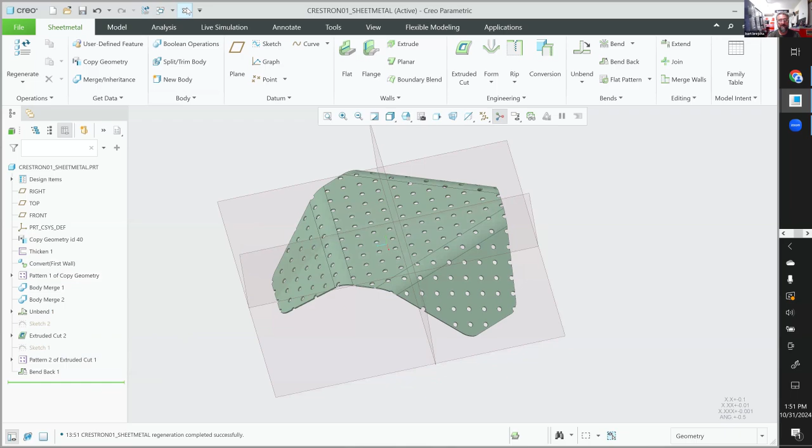So typically when I build something with top-down design, I just hide it and publish everything. This has got publishes at the bottom. I think of this publish as a neat, tucked drawer that I can organize, and then the rest of the team finds it convenient—they don't need to get out of their chair and ask me what to do. We developed that workflow.

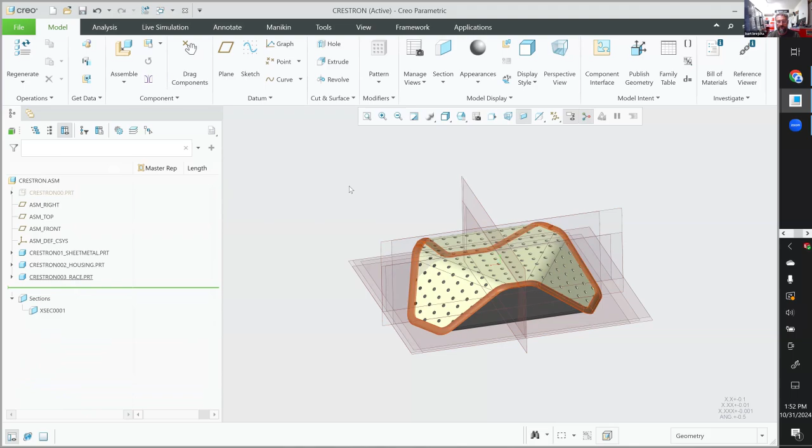Something similar to that workflow at Fisher Price when we would build the Power Wheels riding toy. The manager wanted to get other people working on the product, but they couldn't because I wasn't done with the skeleton file yet. If I'd have known I could have published the geometry out, I could have submitted it in Windchill and gotten smart interns working on their mechanism for opening the door and so on.

So published geometry allows managers to feel comfortable throwing people at it. That's why I call it the teamed approach—nobody wants to argue with the team. They'll tell you top-down design is not appropriate for our project, but the teamed approach to top-down design, that's different.

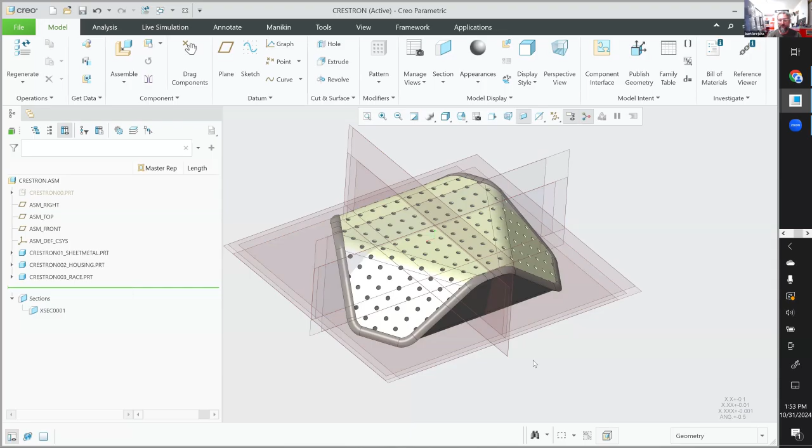Anybody have any other questions? Pop quiz—where do I work? Not Fisher... Design... Price. Hi, Dan. Design Engine. Fisher Price, that's funny. Yeah, all over the world. But based in Herman Miller now—got me going to India this year, so I'm training up the competition in India.